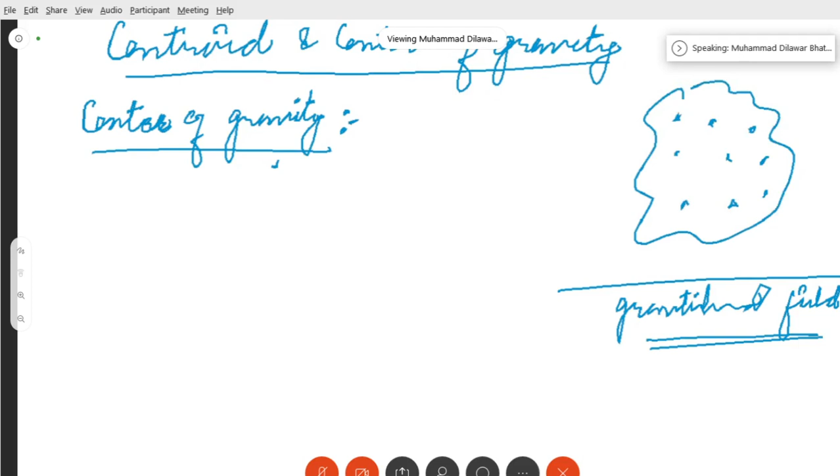Now we also know that this body, when located within a gravitational field, is composed of an infinite number of particles, and those particles have some weight. If we say the total weight of the whole body is W...

Now the different particles that are on this body will each have a weight dw, let's say dw1, or just dw. The summation of all these dw's will give you the total weight, which will be equal to the integral of dw, because it is the summation of the weights of all the particles.

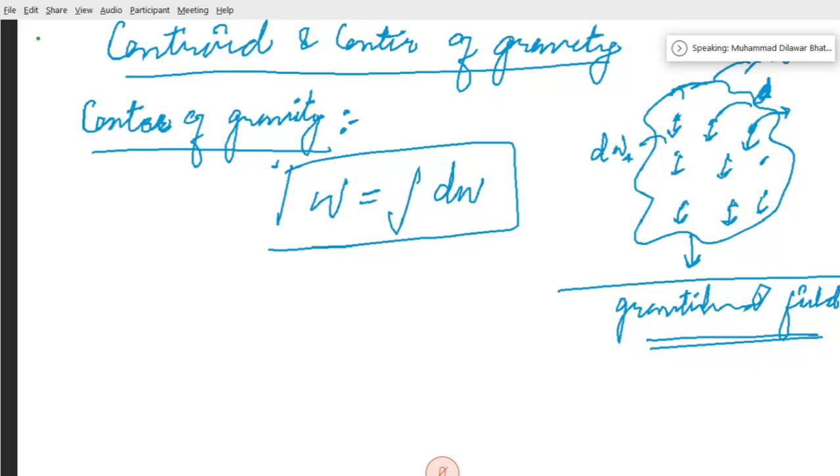Since these particles make up the total weight of the body, it will be attracted towards the gravitational pull, because there is a gravitational field from which we calculate the weight of the body. If a particle has mass m, the weight will simply be mass times g, and it is being attracted towards the Earth's center. Every particle of this body is being attracted towards the Earth's center.

Now the force of attraction is simply proportional to the mass of the particle. Therefore we can say the mass is being pulled downwards, and when that mass is pulled downwards due to the gravitational pull of the earth, that is known as the weight of the body. Mass, when attracted downwards towards the gravitational pull with gravity g, is called the weight of the body.

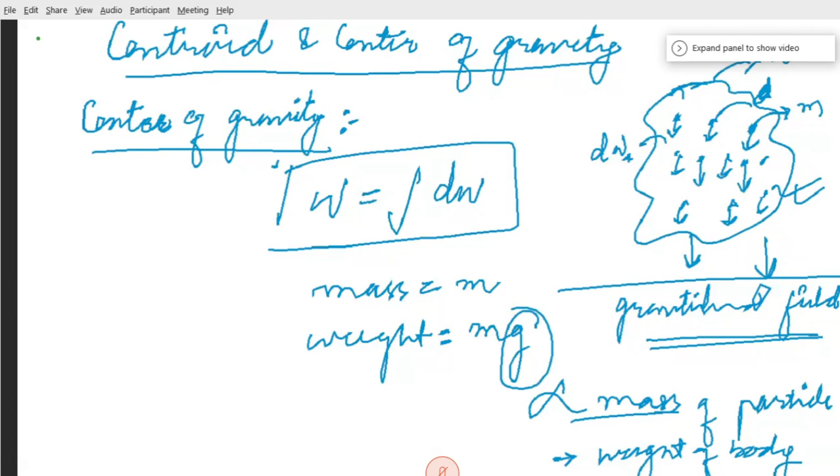We see that all these particles form a parallel system of forces towards the gravitational pull. They are all parallel, pointing downwards, because of gravitational forces.

Now, we have discussed that we have a number of particles, and each particle is attracted towards the center. If we look at the resultant of all these particles, we see what will be the resultant of all such parallel forces which are there due to different particles being attracted towards the gravitational field.

This point through which the whole weight W of the body acts -- where dw was the differential element weight -- when I take the resultant, let's say this resultant is W, the resultant of all the particle weights. It is the resultant of all the parallel forces due to particle weight, irrespective of position. We don't consider the position of the forces; we check the magnitude of all the forces irrespective of position, and the point where you calculate the center of this resultant force is called the center of gravity.

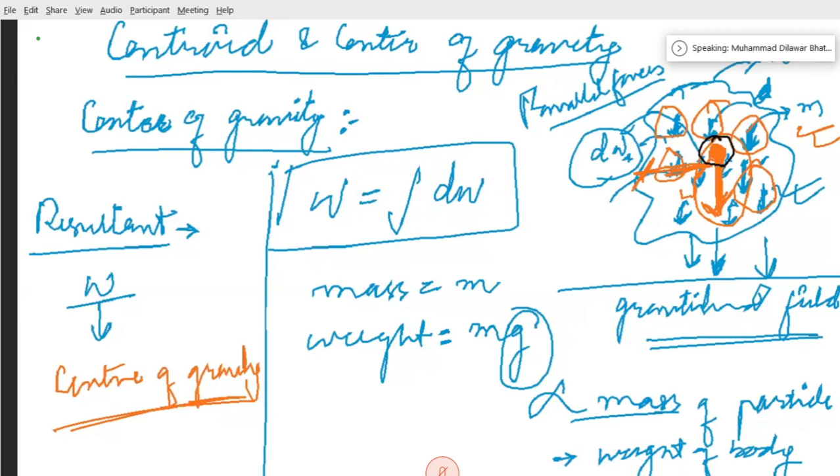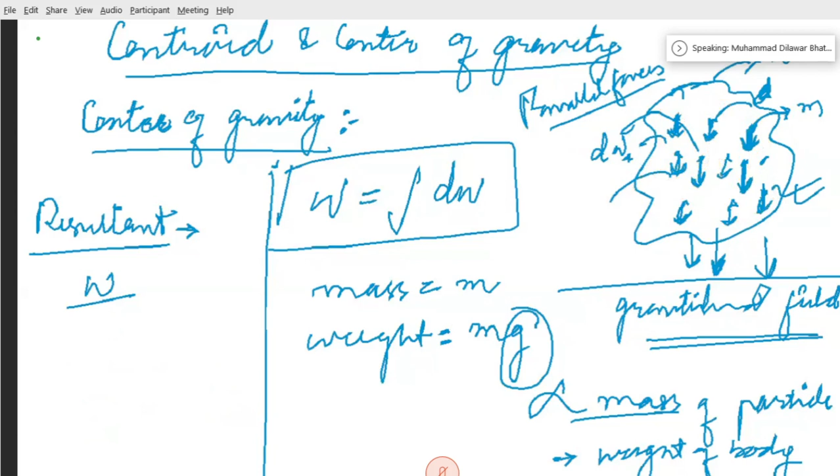Now, how is it different from centroid? What does centroid and center of gravity mean? Are they the same or are they equal? It depends. They are actually in some cases the same, or they can be different. It primarily depends upon the type of body, or what parameter of the body you are discussing about.

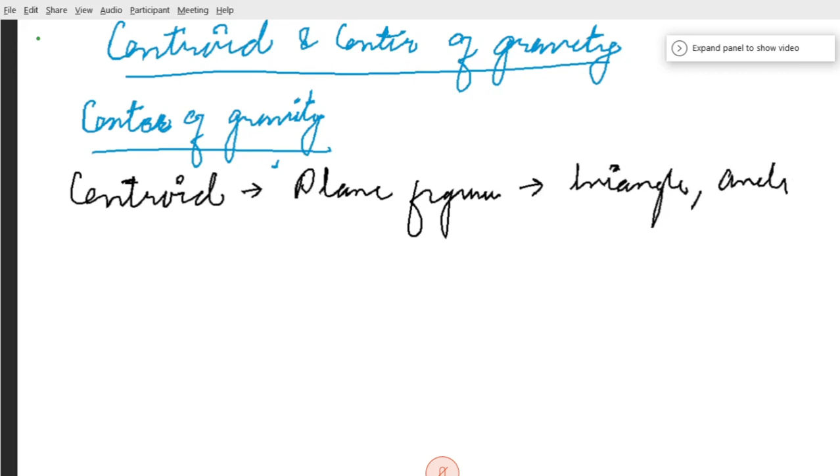Centroid is used when you are basically discussing plane figures, which include triangles, circles, etc., wherein you are discussing areas. When we have a circle, what are we concerned about? We are concerned about its area, maybe its perimeter. We are not discussing about its weight. When we talk about a circle, it means we are concerned about area. There we don't have any mass, we're not discussing about masses.

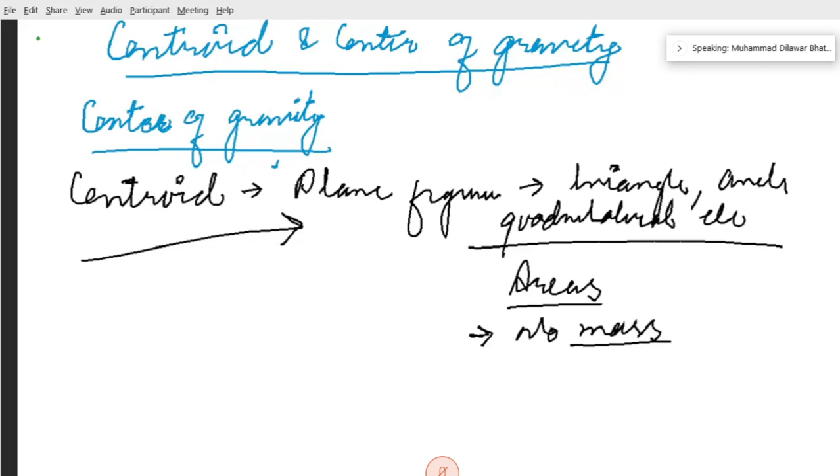Centroid is said to be for plane figures - we call center of gravity as centroid for plane figures. Now how can we actually calculate this center of gravity and centroid? What are the various methods by which we calculate centroid and center of gravity? We have primarily two types of methods.

Firstly, we have by geometrical consideration. Secondly, we have by moment. First one was geometrical consideration, and second one was by moment method. Now, firstly, we'll discuss geometrical considerations, wherein you can calculate your centroid or center of gravity.

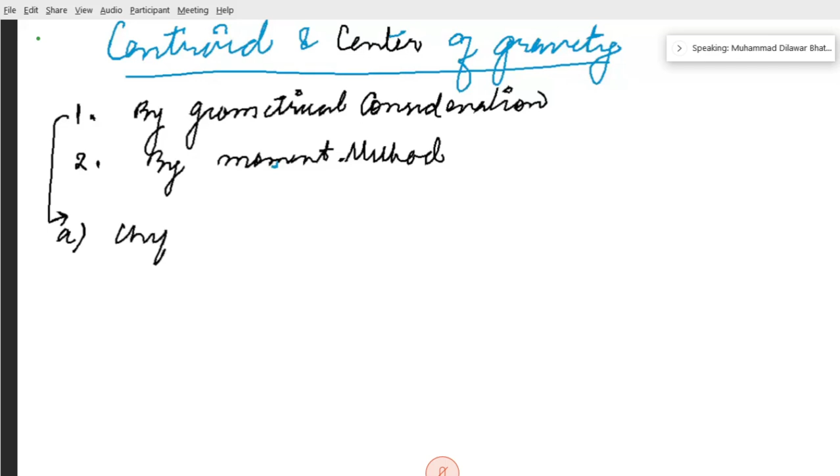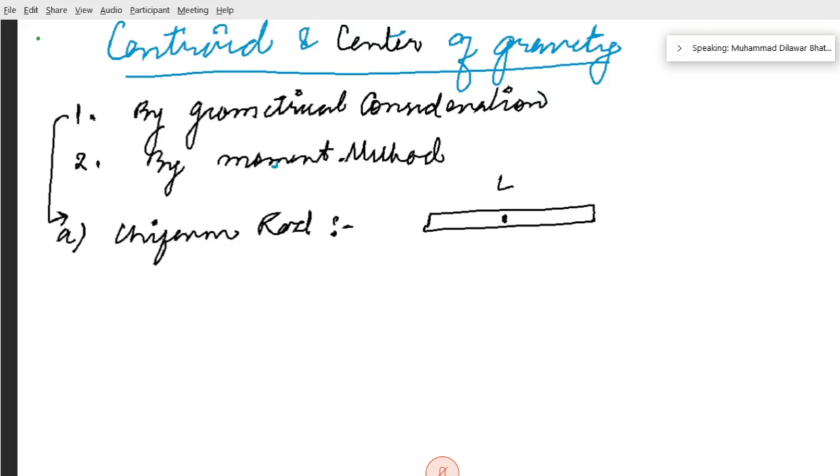Firstly, if we have a simple uniform rod, how can we calculate its center of gravity? We have a simple rod and we want to know the center of gravity. If it has a length, you need not do much - you can simply say at the middle point it will be having the center of gravity, wherein this will be L by 2, this will be L by 2. Let's denote this center of gravity by G. It will be at the middle point.

Simple uniform rod. Secondly, if we have a simple rectangle - these are geometrical considerations where you need not calculate where is the center of gravity. In a rectangle, let's say this is your rectangle, it has length L and height H. You can simply say at a distance of L by 2 from this point, and at a distance of H by 2, and at the point where they meet, here is your G. Simple - at the center of that you will be having your centroid or center of gravity.

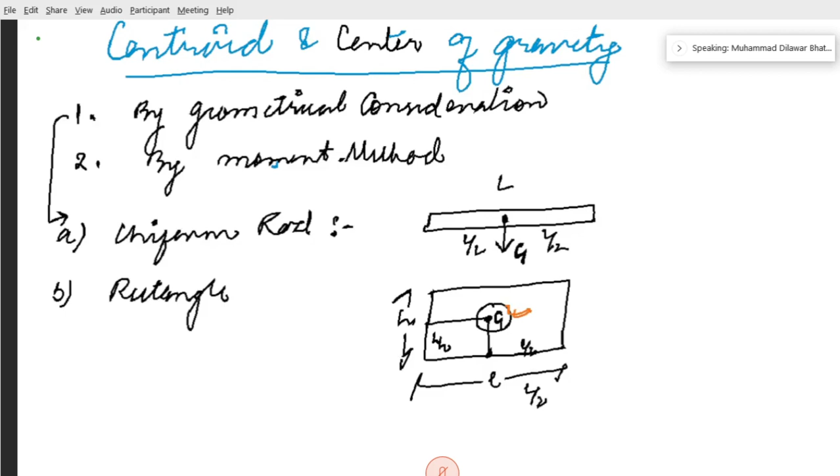Now if we have a simple triangle, let's firstly say we have an equilateral triangle, and we want to calculate the center of gravity. Simply, the center of gravity will be where the medians meet. This is the point where the medians are meeting, and you can easily say this point is your G, where the medians meet.

Now we can have different types of triangles. For example, let's say we have one more triangle, which is a right angle triangle. Where can the median be held? Let's say it has some dimensions - let's give them names A, B, and C. Now if we want to understand how to calculate the medians, having base denoted by B and height denoted by H, we want to know where is the median - simply we want to know where is G. Now from similar triangles, we can simply say where the median can be.

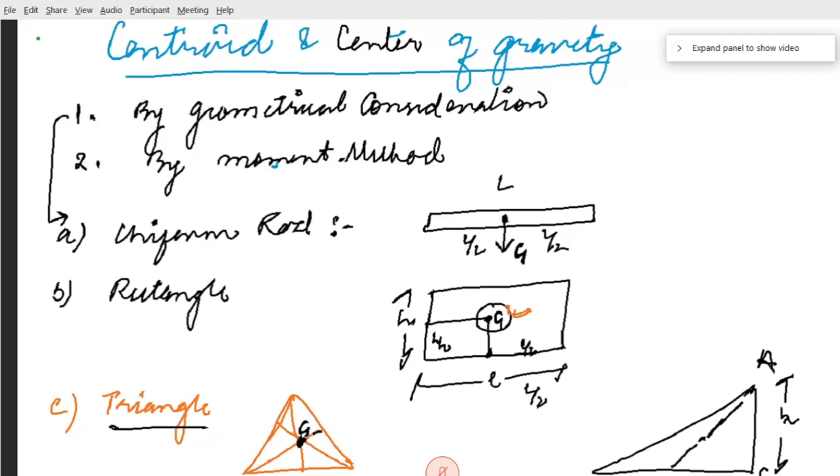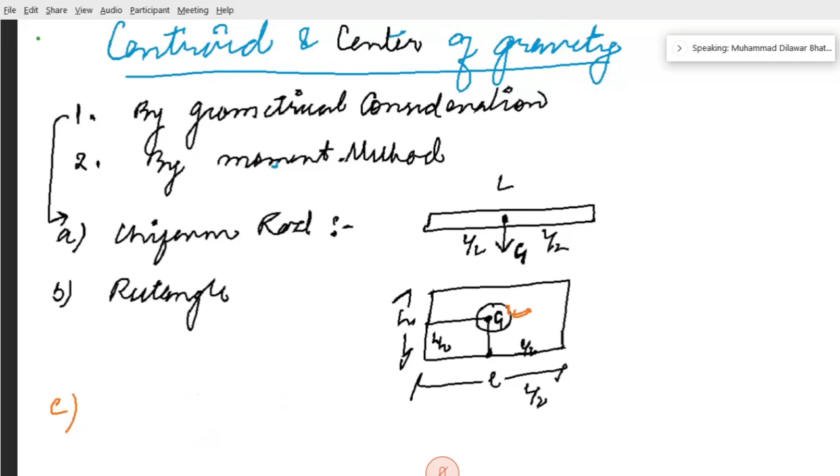Let's draw a median, don't touch the screen. We have this right angle triangle.

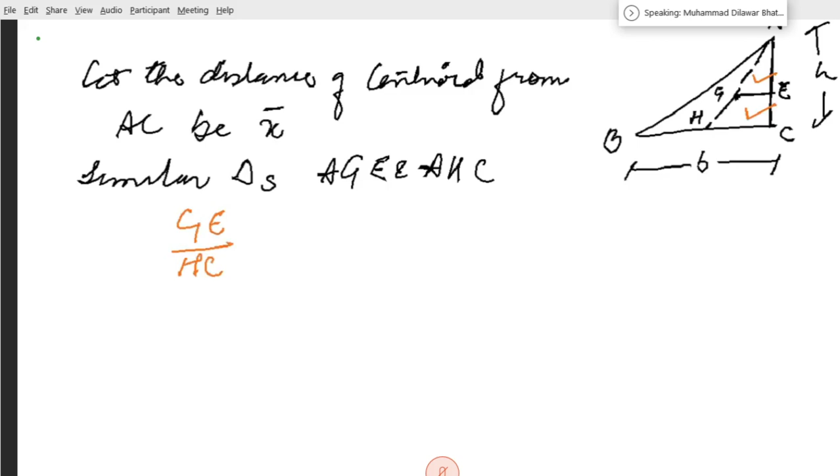In order to calculate the centroid, let's say points A, H, and C. That means these two triangles, this triangle and this triangle - we can say GE by HC, GE this and HC the bottom one, are equal to AG this one, by AH. It's a right angle triangle, so you need to understand they are actually equal to 2 by 3. Therefore, you can say your GE, or X bar, is equal to 2 by 3 of HC.

And HC is how much? 2 by 3. HC is your B by 2. So you can say it is cancel out, B by 3. Therefore, you can say centroid

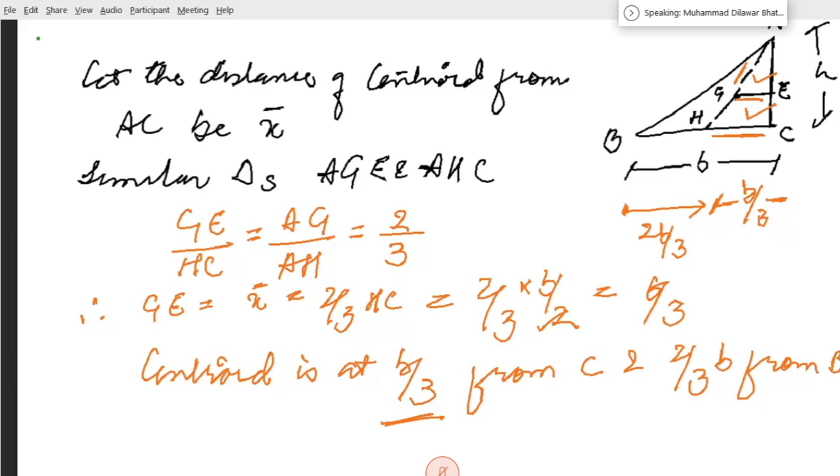is at B by 3 from C, and if this is B by 3 from this point, therefore you can say from this very point, B point, it will be twice B by 3. It will be 2 by 3 B from B. Okay? It will be B by 3 and twice B by 3.

Therefore, you can simply say when you have a right angle triangle, let's say centroid is at this point, from this point it is 2 by 3 of B, and from this very point it will be B by 3. This is with regard to right angle triangle.

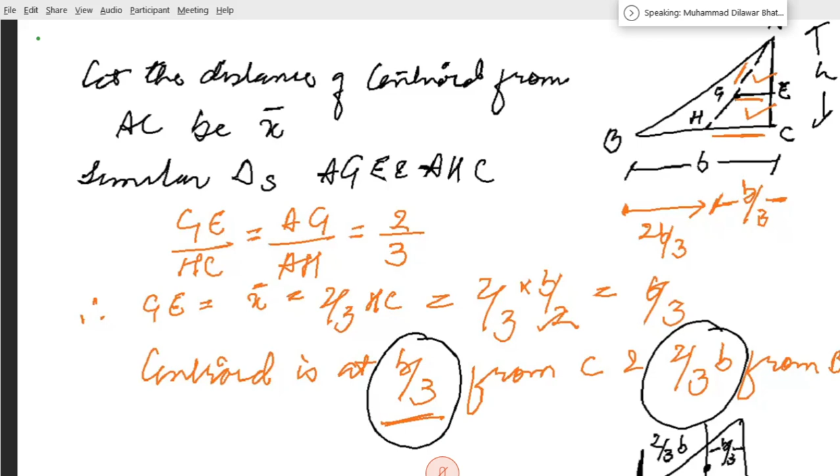Now, if we have, okay, fine. One more: centroid of trapezium. Center of gravity of trapezium.

Okay, before centroid of trapezium, I would also like to tell you one more type of triangle. Let's say we have any sort of triangle wherein we don't know whether it is an equilateral triangle or a right angle triangle. In such cases, how will you calculate your center of gravity? Let's say this is point A, this is point B, and this is point C. Center of gravity of any triangle, wherein we don't know all the dimensions of the triangle.

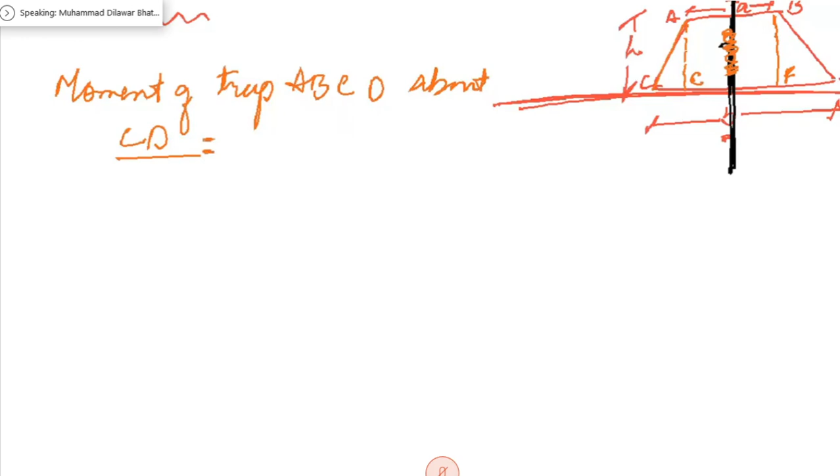Now, the moment of the whole trapezium ABCD, let's say about CD. Please have a look that this time I'm not checking in the vertical direction, I am checking it from the horizontal direction. This will be simply equal to the moment of triangle ACE, plus the moment of triangle BFD, plus the moment of the rectangle ABFE.

And summing up the moments about CD, if you solve it, you will get the centroid distance. So that is your homework. Please do it yourself. Solve the moments for the different shapes, sum them up, and then tell me what your centroid will be. Here it is not from the x-axis, it is from the y-axis because we have calculated it about CD. CD is in this direction. That means you will get your centroid along the y-axis.

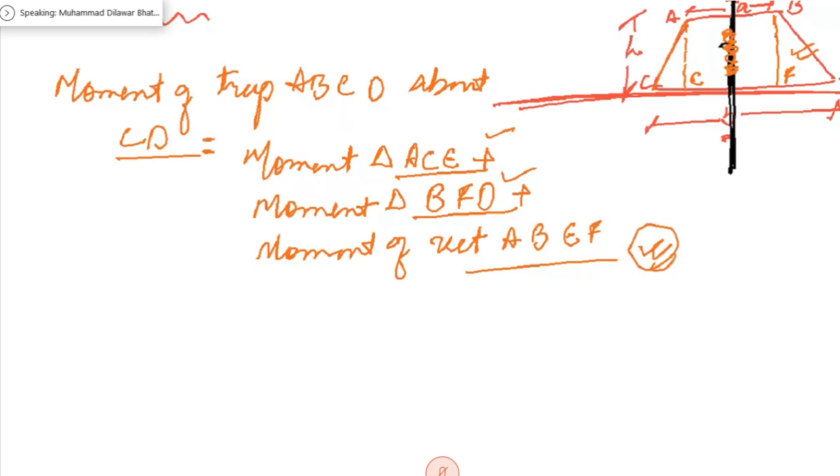In this case, it will be equal to h by 3 times b plus twice a divided by b plus a, from CD. That means from CD you can write y bar is somewhere here. This is the distance.

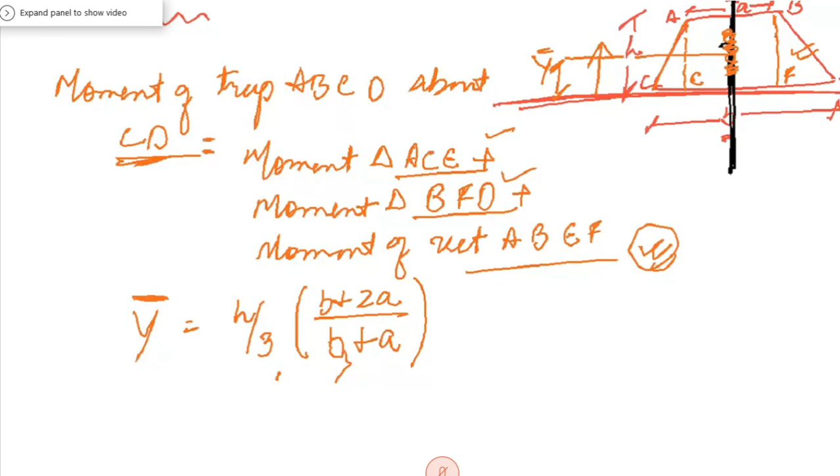So here your center of gravity, as you have calculated, is h by 3 times b plus twice a divided by b plus a. That means it is at this point, on the center line, and this distance is your y bar. This is your center of gravity or centroid. This was the centroid of a trapezium. Now, can anybody tell me what will be the centroid of a semicircle?

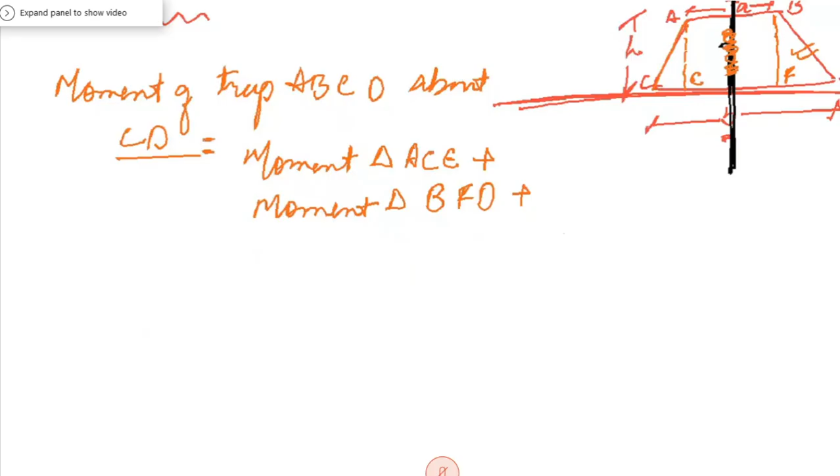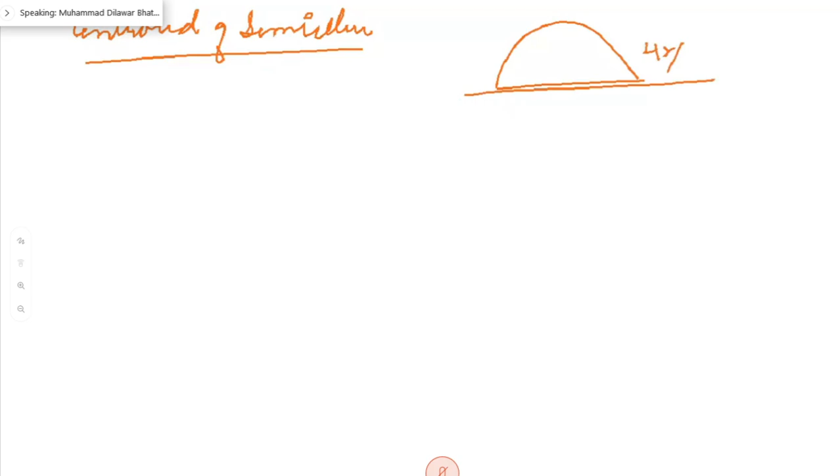Centroid of semicircle. If this is your semicircle, the centroid from this base is 4r by 3 pi. Again, from the y-axis, you can see the centroid is 4r by 3 pi. This is for the semicircle.

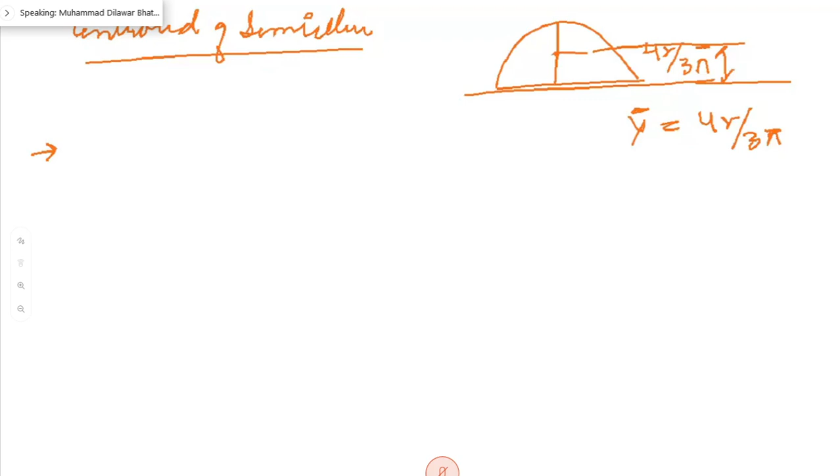Then you have, I cannot show you all of them. You have to do it yourself. Again, when we talk about parabola, maybe you need not do it for this semicircle; it will be tedious, but this is an assignment for you, not right now. I will give you this in an assignment, but after a few classes, because you will get to know how this actually happens.

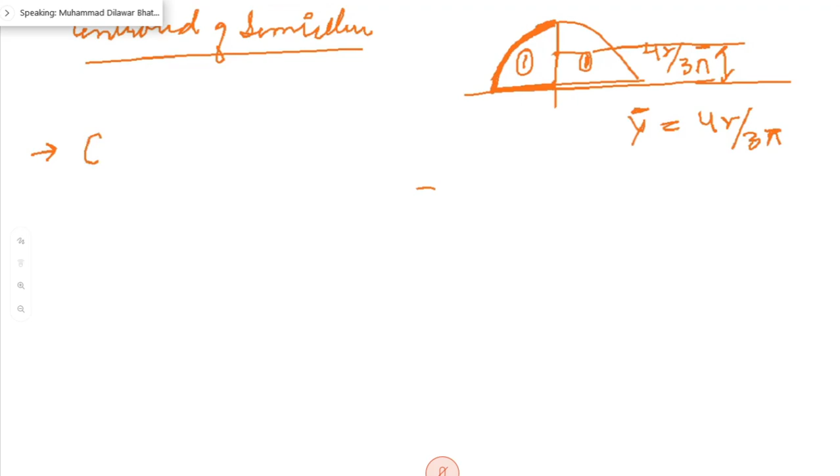And then we have a few more. For example, we have a cube. If we have a simple cube, can anybody tell me where the centroid of any cube can be? Because a cube has all dimensions the same, if we have L as the dimension, L will be the same for all the sides. Therefore, your G will be at a distance of L by 2 from every face.

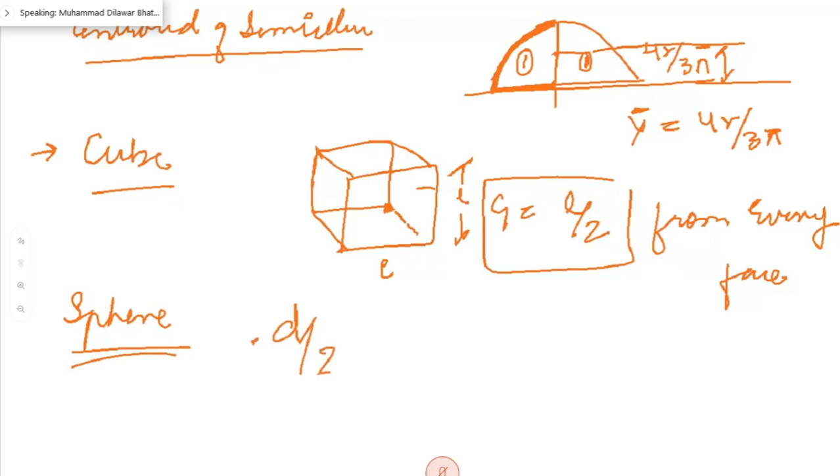Now, if you have a sphere, your center of gravity will be at d by 2. The center of gravity of a sphere will be d by 2 from every point. If you have a hemisphere, it will be at a distance of 3r by 8 from its base.

Okay. Right circular solid cone: h by 4 from the base. Your centroid will be at a distance of h by 4, and you need to understand the reference point here is in the y direction. That means y bar is h by 4 from the base.

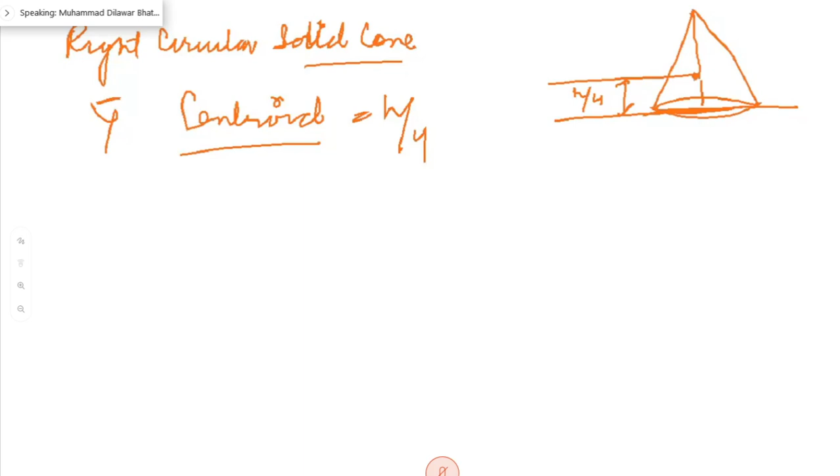But when we have complex figures, for example semicircle or hemisphere, without going into the calculation of geometry, we simply do it by moments. Moments is the best possible method to calculate the center of gravity. Now, what does this method of moments say? What is it all about? You might have already discussed calculating by the method of moments.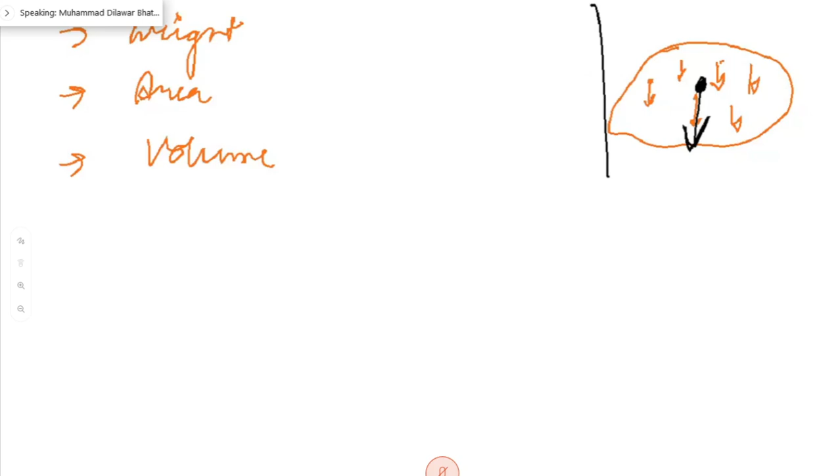Please do not touch the screen.

Let's say this is our y-axis, this is our x-axis, this is our z-axis, and we have been asked to calculate the centroid from all the axes. Now, as we had discussed earlier, what does this centre of gravity mean? The centre of gravity of a body is that point through which the resultant of the system of parallel forces formed by the weight of all the particles passes. Here we are talking about the weight of all the particles the body possesses.

And given the reference point, we can calculate the total weight of that body with reference to the centre of gravity. For example, let's say we have different masses: M1, M2, M3, and so on. When we talk about weight, if M1 is the mass, the weight will be M1g. The next weight will be M2g, and if M is the total mass, the weight will be M times g.

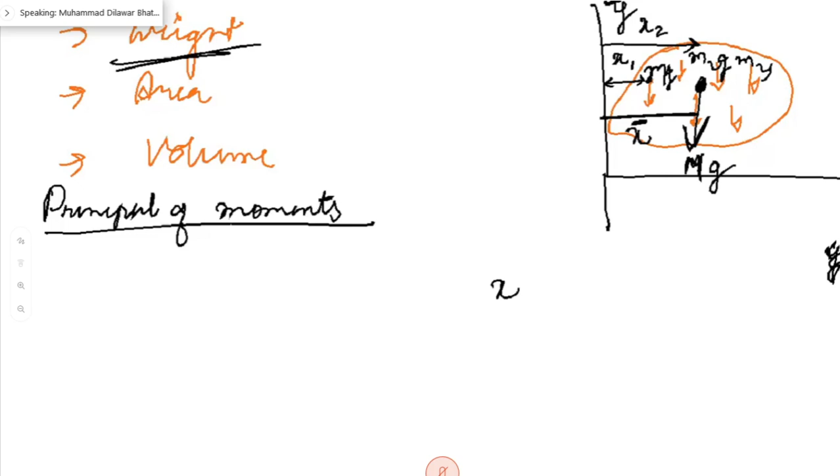Now, at different points of these masses we have different centroidal distances, and in order to calculate only one centroidal distance for the whole resultant mass or weight, we use the principle of moments, which I have already used in showing you how to calculate the centroidal distance of various plane figures like the triangle, right angle triangle and so on.

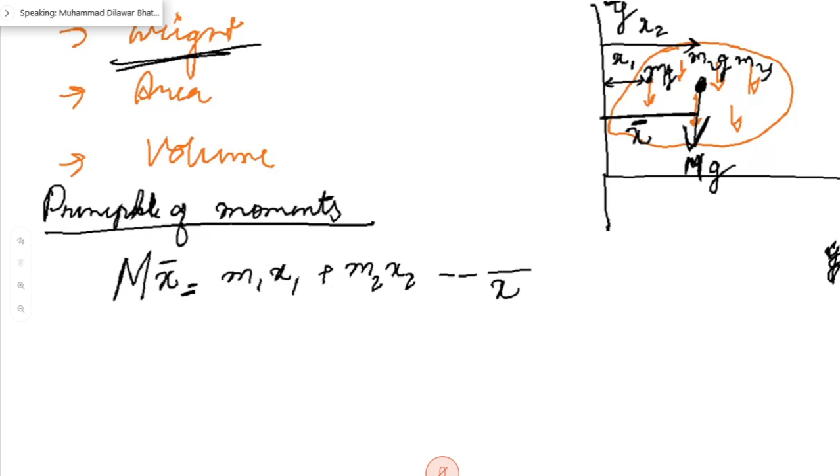If you calculate it by the principle of moments, the total mass times the centroidal distance will be equal to m1 x1 plus m2 x2 and so on. So your centroidal distance will be equal to the summation of masses into their particular distances divided by the total mass. This will be the centroidal distance of that body. And the total mass will be equal to m1 plus m2 plus m3 and so on.

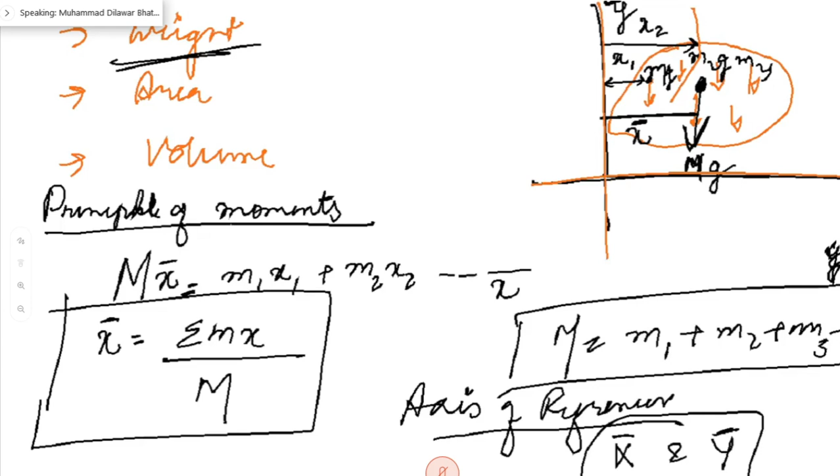And the reference point is the axis of reference. The axis of reference will define whether you are calculating x bar or y bar. The axis of reference of any plane figure is usually taken as the lowest line. Here at this point this is the lowest, and on the y-axis this is the lowest axis point. Now you can again say, if you have to calculate various

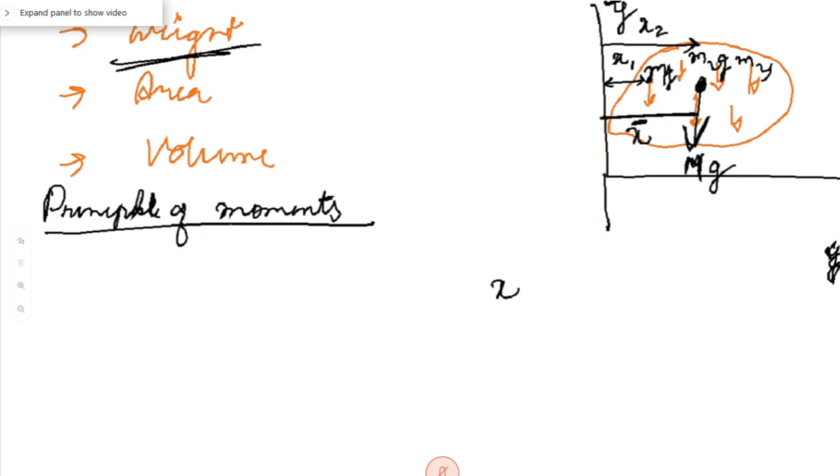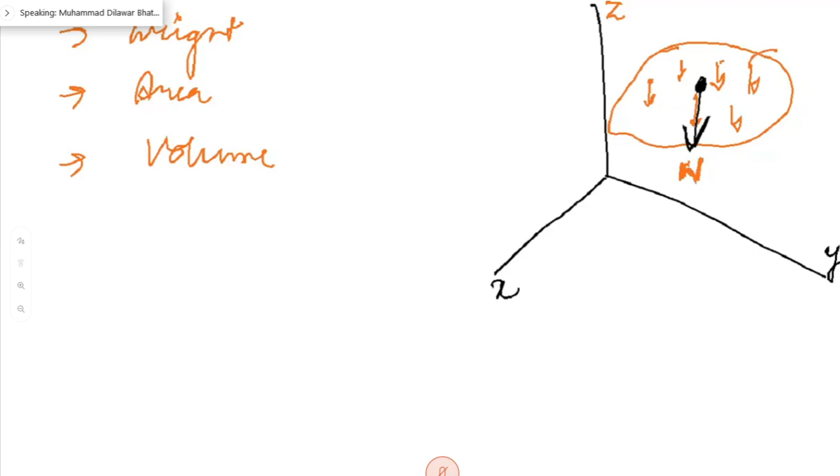Okay, fine. Now we want to see what happens with all three axes, that is x, y, and z axes. How can we calculate it? Here, the total weight is the resultant, and the individual particle weights can be represented as dw. So our W is equal to the integral of dw. Our total weight is the summation of all the particle weights.

And we want to know the centre of gravity with respect to x, with respect to y, and with respect to z. Let's say this is our y bar, this is our x bar, and this is our z bar. We want to know in all three axes where the centre of gravity is: in x, in y, and in z.

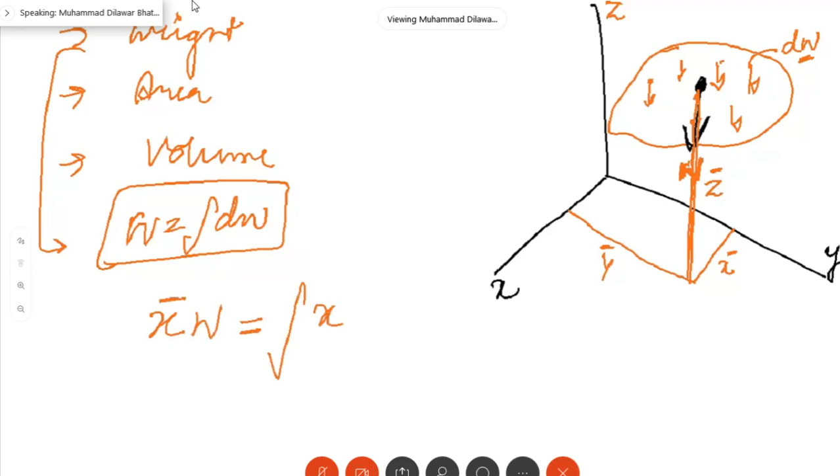Now, for example, if we have to calculate what actually happens, but again here you have to see, okay, x bar, when we are talking about the x direction, x bar multiplied by the total weight will be actually what? It will be simply integral of x times dW. It will be an integral because we have to integrate it through all the particles, right? So you can simply say, in the x direction, x bar is equal to integral of x dW divided by, as we know that W is equal to integral of dW, integral of dW. This is with regard to x bar.

And if we are talking about y bar, y bar will be again equal to integral of y dW divided by integral of dW. This will be in the y-axis, and in the z-axis, it will be again integral of z dW divided by integral of dW. This will be in your z direction. Simple. There is nothing much which needs to be explained here.

Now we can also have a few more things. This was with regard to weight, right? Now what will happen if we are talking about masses? Again, the weight will be replaced by masses. g will be equal for every volume, every weight, and it will be the same. For example, here your x bar, if you are talking about only mass, will be equal to integral of x dm divided by integral of dm, right? And y bar will be integral of y dm divided by integral of dm, and your z bar will be integral of z dm divided by integral of dm. This is when we talk about masses, when we talk about mass of any body.

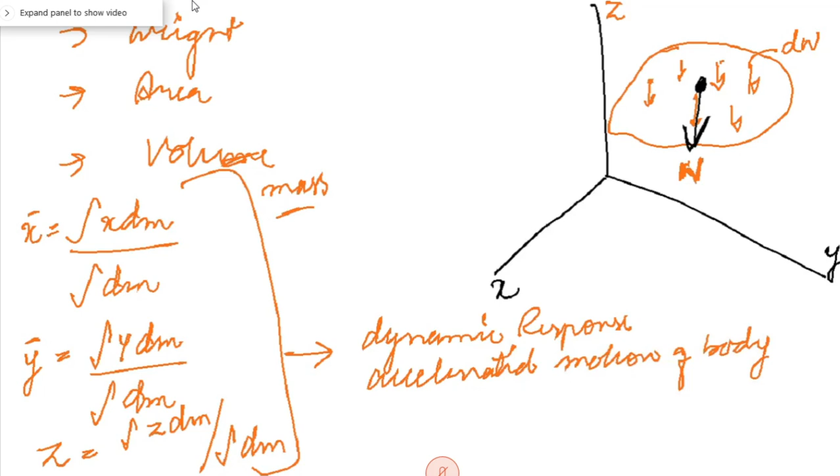This is primarily done for dynamic response, or we can say accelerated motion of a body, right? This was with regard to mass. Now if we talk about volume, as we already know, mass when we are talking about volume means we are taking what we call density into consideration, because density will be constant for the masses. So here you can say

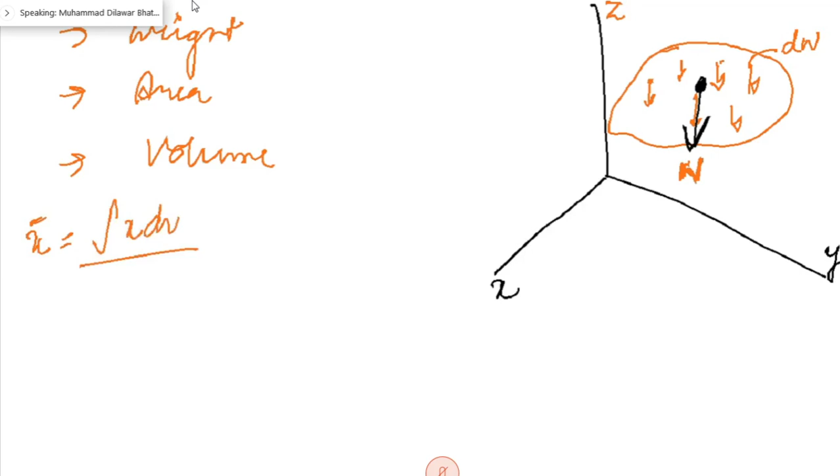x bar will be again equal to integral of x dV divided by integral of dV, and y bar will be again integral of y dV divided by integral of dV, and z bar will be equal to integral of z dV divided by integral of dV. This is with regard to the centroid of a volume. And about area, I have already discussed. Area will be simple. This is for volume V.

When we are talking about area, it will be integral of x dA divided by integral of dA. This is area A. And this will be integral of y dA divided by integral of dA.